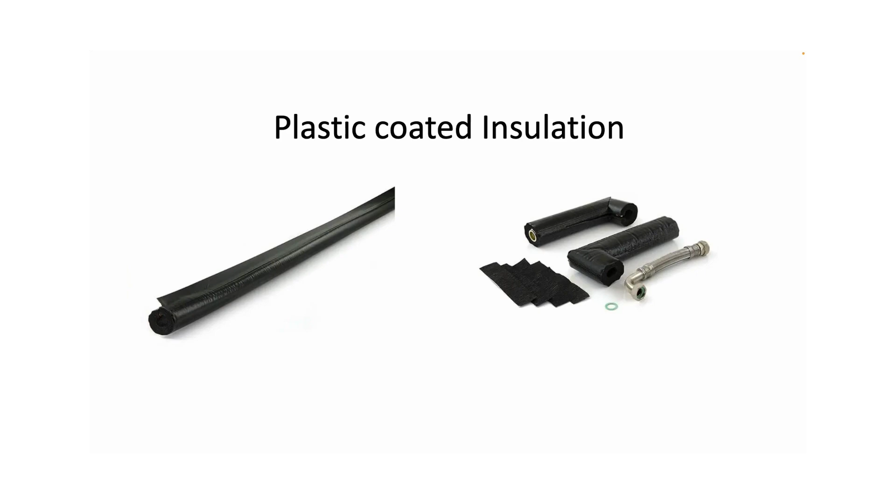Hi everyone, I thought I'd do this quick PowerPoint video to help you understand plastic coated Class O insulation from your competitors and why I've made Primary Pro. To be honest, because we were having these problems. On the air source heat pumps we were fitting this type of thing and it didn't work, and here's the reasons why it didn't work.

The first is, if moisture gets inside that Class O, plastic coated or not, it turns into a soggy sponge and holds the water and starts to deteriorate. If it's plastic coated, it can start to deteriorate it from the inside out. As you can see here, around the outside it's okay, it's not broken through, but you can see it's all cracked. You can see the holes here all the way through, that's turning into a sponge.

This one is exactly the same as the right hand side. That was as it started, and that's 6 months later, just being left outside.

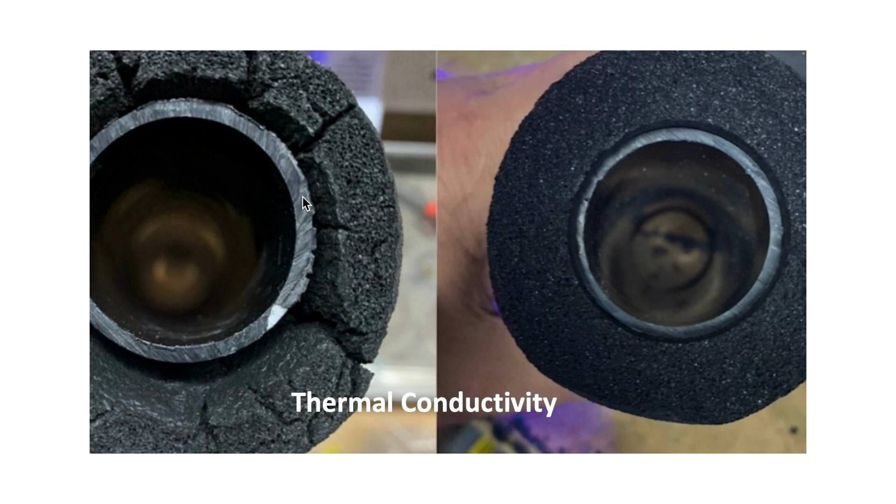We've also got, the biggest problem is thermal conductivity. You need to have the thermal conductivity, the K factor, as low as possible. That gives you the best insulation values. If that's wet, then you've lost all the conductivity. It goes through the roof and loses all its thermal insulating properties, so it just becomes a wet rag that doesn't insulate anything at all.

These are the videos of some plastic coated insulation that we left outside for 6 to 7 months and just left them to the open elements to see what it can do. Let's go through this one.

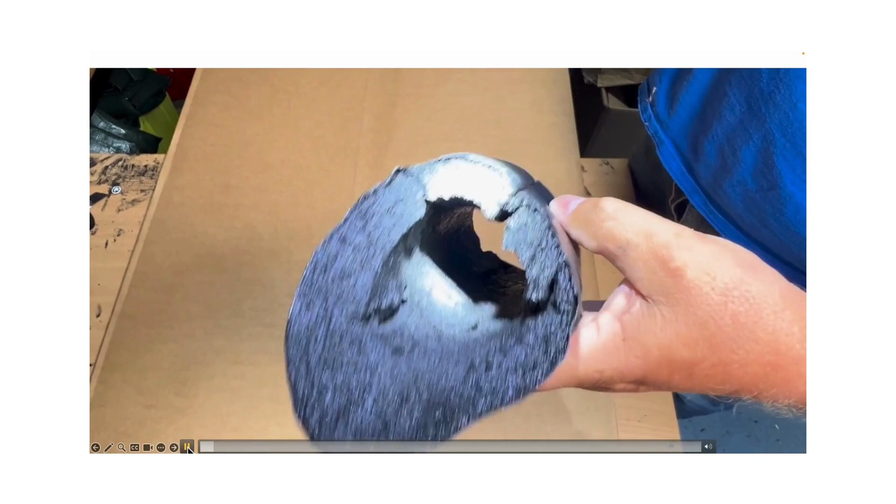As you can see there, the plastic seems to be okay, but inside it started to crack and deteriorate, so that's going to have a massive problem on the insulation factor and on keeping the conductivity level as low as possible.

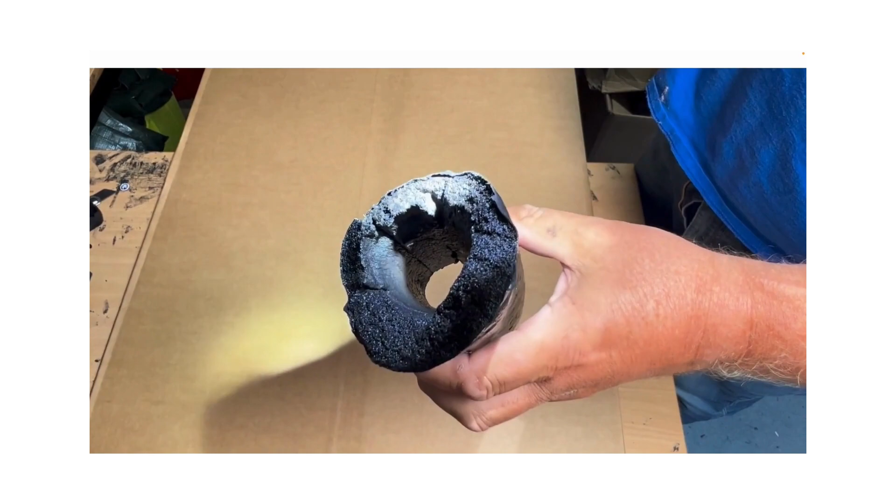There you go, it's all cracked all the way through, so nigh on useless. But the biggest problem is that it then holds water, and if it starts to hold water, it's nigh on impossible to give you any thermal insulation values. As you can see from this, it's absolutely sodden.

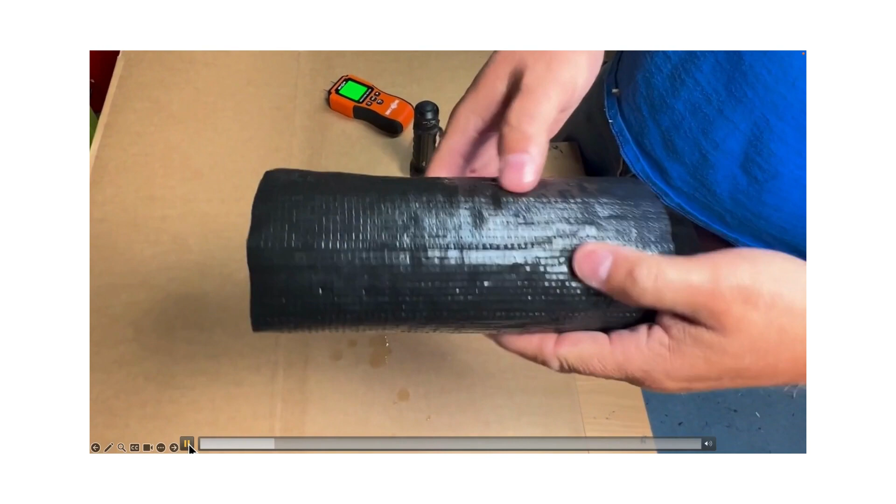This is another one, another type, and as you can see there, can you just see how rough it is? Well, that was where it was facing the sun, and it had started to deteriorate after 6 months. So you can tell there it started to deteriorate the insulation straight away.

But again, absolutely full, no insulation value whatsoever.

If it's not plastic coated Class O, you'll still get no insulation value and it starts to deteriorate. And we found this more with condensates because we haven't got a lot of photos on air source heat pumps, but we will collect them. But as you can see, it's exactly the same Class O.

If it's plastic coated and it's not sealed up correctly, it will then do exactly the same as we've just seen.

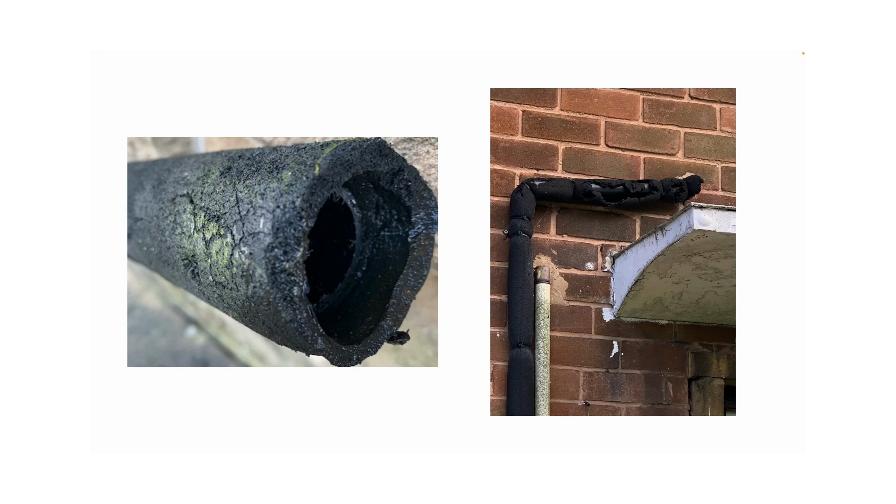The problem again is we need to fit the manufacturer's products to seal it all properly, but the Armaflex or other adhesives are not fit for outside, they're not fit for purpose. So you can see the assembly instructions state: please observe our installation instructions, product data, application temperatures, ideally 20 degrees plus, not below 0 degrees, at an ambient temperature of below 5 plus, or a humidity above 80%.

Increased condensation may form on the surface of the glue or adhesive film. In these cases, the bond is poor or impossible. So that's telling you it doesn't work, and that's why people don't fit it right, because it doesn't work. So they've just left it on its own.

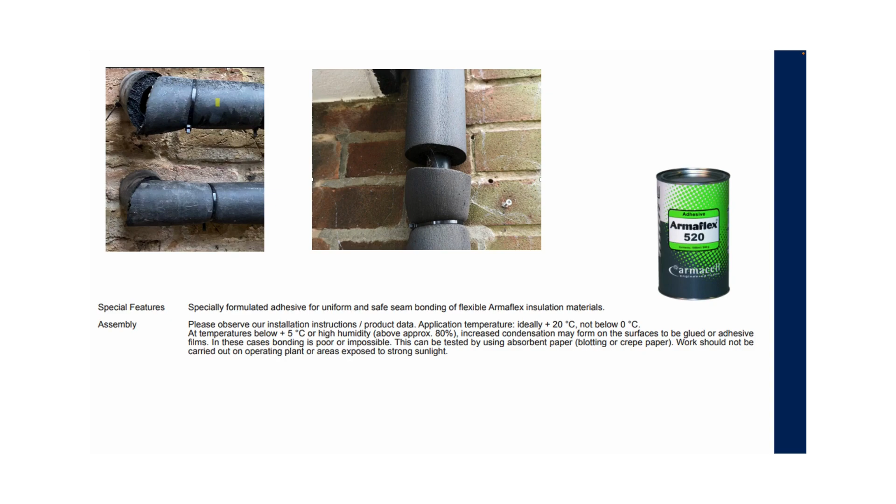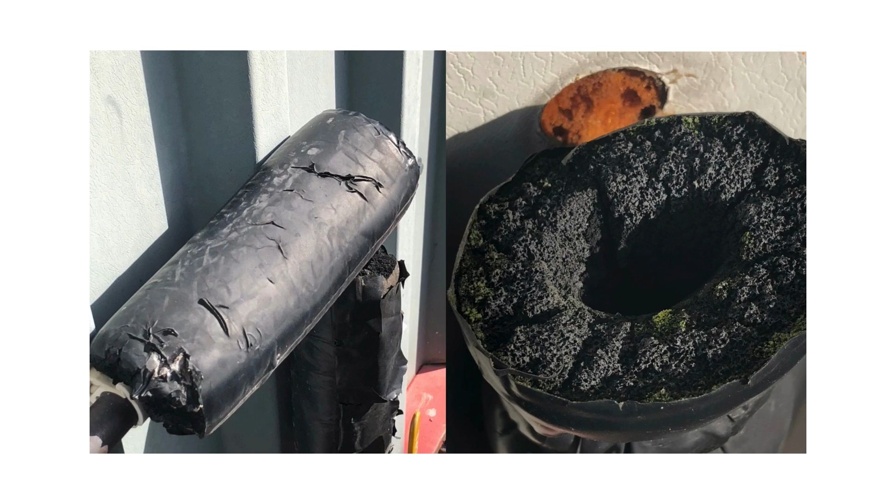Doing all these things right and trying to get it done and not being able to do it is just time and cost, and this is why the guys don't do it on site. This is why it starts to deteriorate, not just on the outside but the inside. They start to fit it incorrectly, start to leave the gaps, then the water will get in, it'll start to deteriorate it.

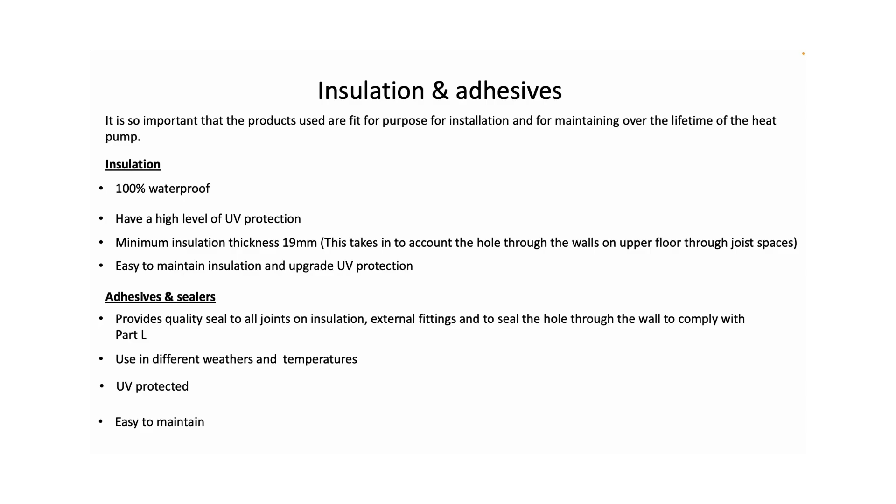So we've got to make sure that the insulation that we're providing has the certain elements that we need to help the installer. It's so important that they're waterproof and all these things, but we've got to make something that's fit for purpose on site, because if not, they don't do it.

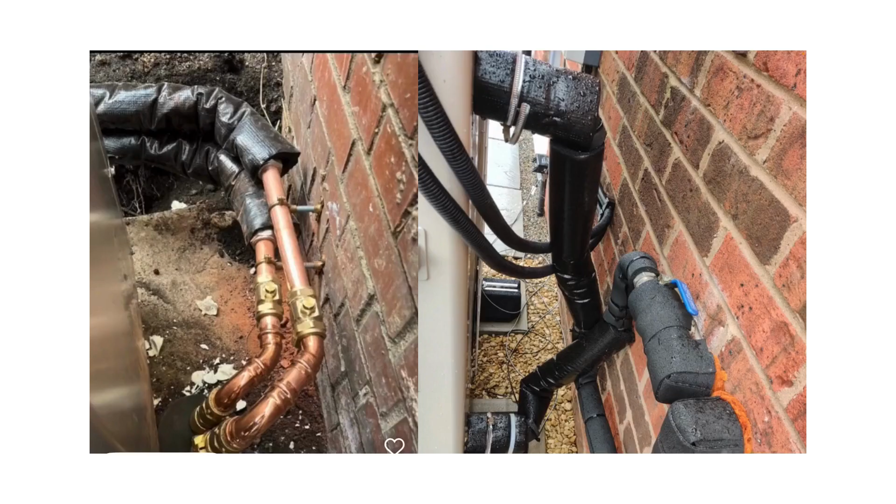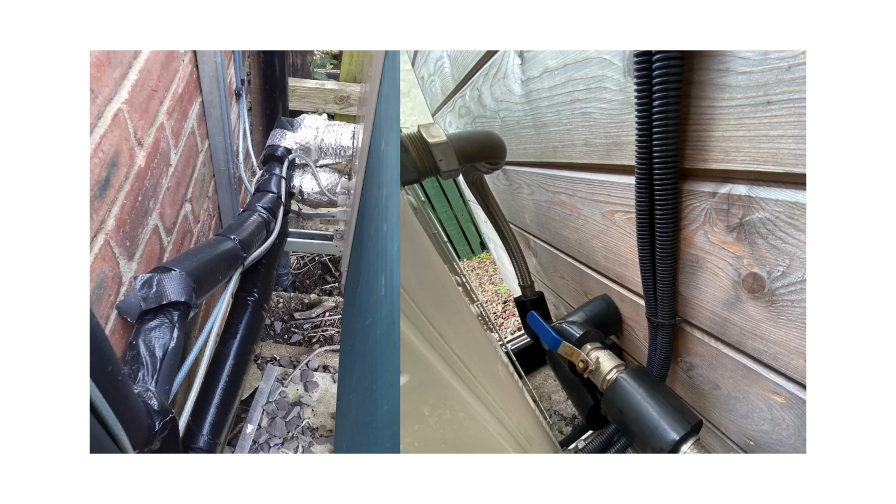And just look at this. Just think that you paid 16 to 18,000 for an air source heat pump, and this was what you was left with. Look at how it looks on the customer's house.

So we've got to find a product that's fit for purpose. We've got to find all the products, not just one product. We have to find a solution.

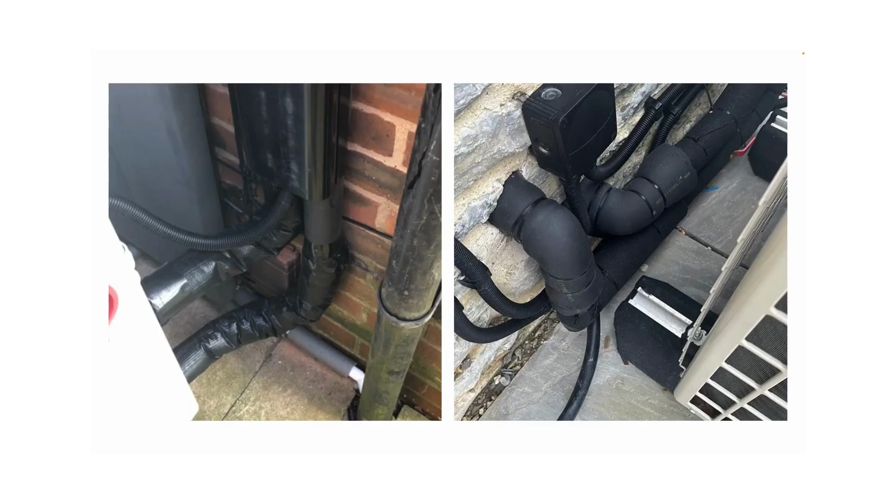As you can see on the left, they've used a flexible, one of our flexes on that one, but still not done it right because they've used some Class O. This one on the right, again, they've used some Class O, and then they've used plastic coated flexes. It's not the right job.

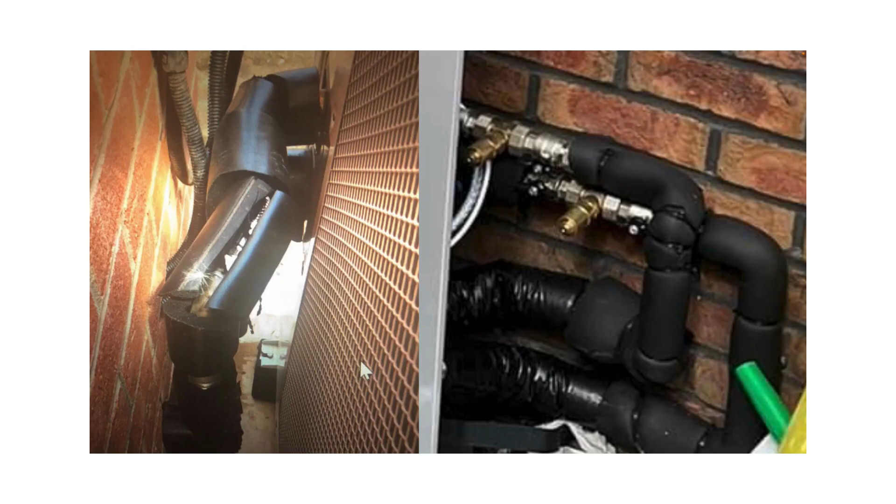Just leaving all the gaps for it just to fail in 2 or 3 months, that'll be sodden. So we've made the products, with our Primary Pro, we've made the products. We've looked at the problems, we've found solutions, and then we've found a total solution.

This is your bent flexi, with two jackets for the end, and then we've put another piece of insulation in, so that seals every part when they've fitted it all together onto the ends. Other insulation, your other flexibles don't have that. We've put everything into a pack. On your straights, exactly the same, but with a piece in to seal the ends.

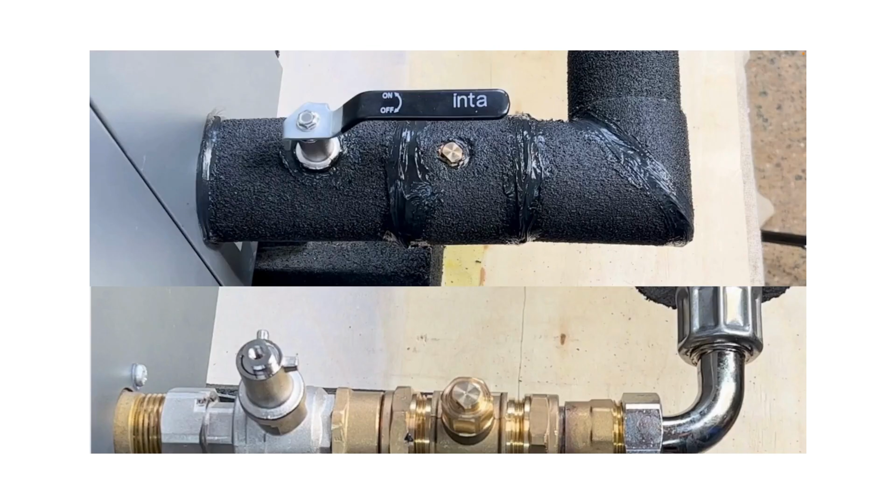So we've made the solution. Looks great, it can also be sealed on every single part. The bottom part there has got your lever valve on and an antifreeze valve, but look how it's all sealed, look how it's all done. It's all done for the installer, so the installer really does like the products. So we've just got to get the products on the shelves.

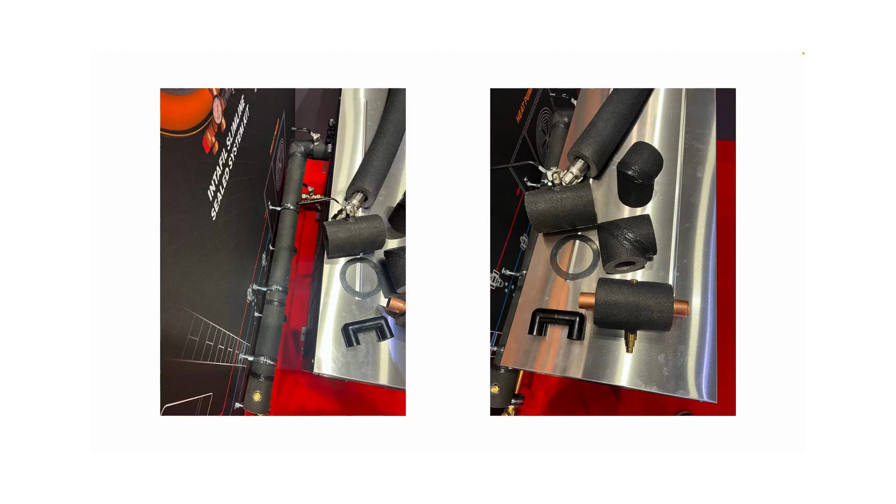One on the left was the display installer. Tell me that a customer wouldn't like that on the back of their house. So it's a lot better than what they've been given. In the past 18 years, it's just been plastic flexes with Class O.

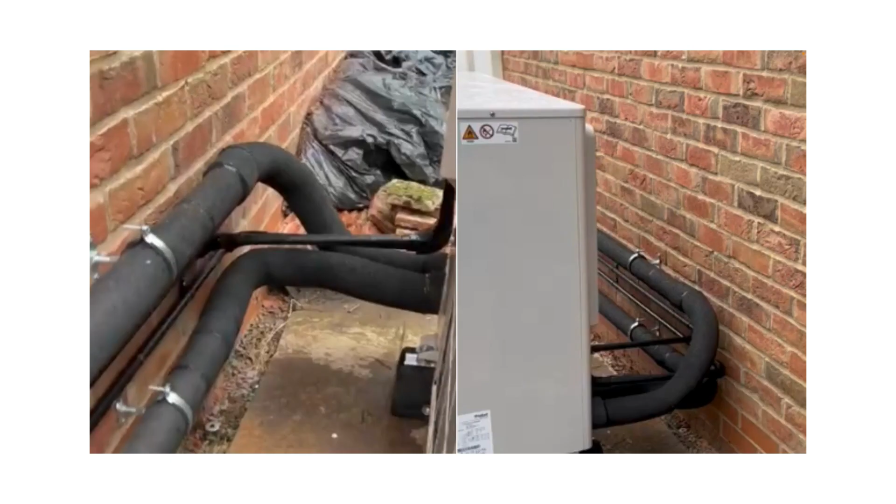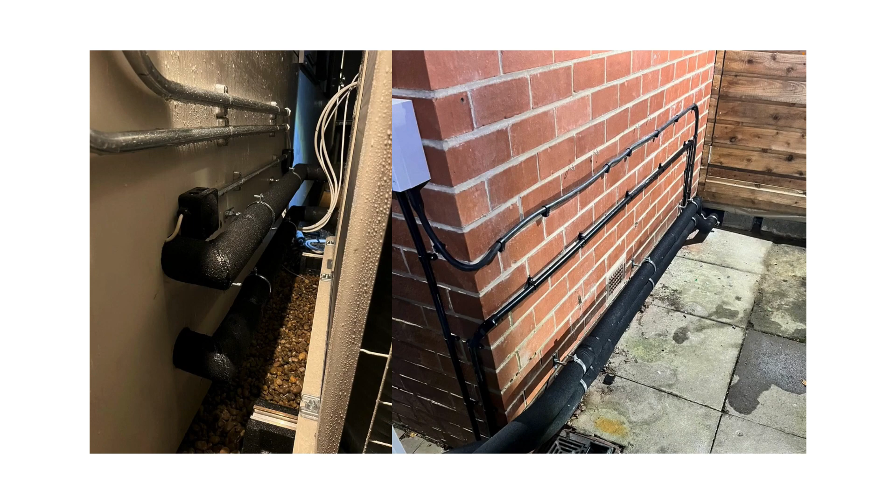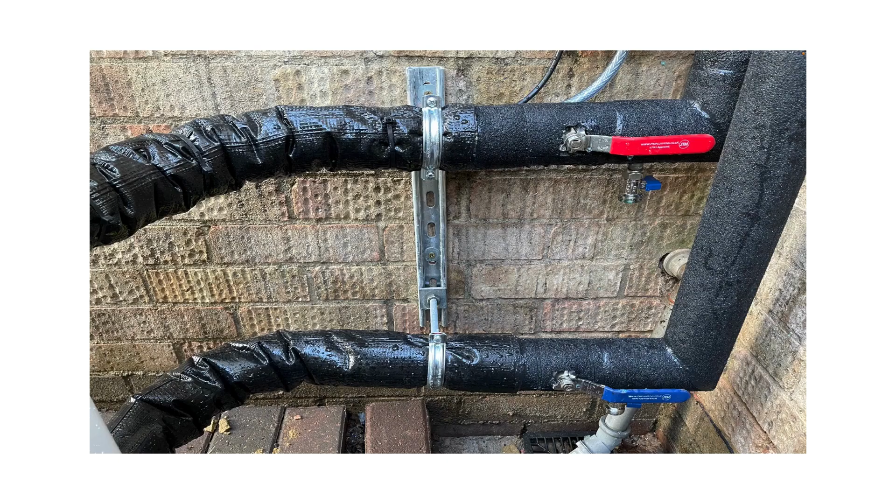These aren't - so they've used our Primary Pro, but they've not used the flexes. Now you tell me as a customer, would you like to see that on your house? And is it going to seal? We've tried to - this installer's tried to seal all the joints up. We've left the lever valves and it's sealed up properly, but still it looks a mess.

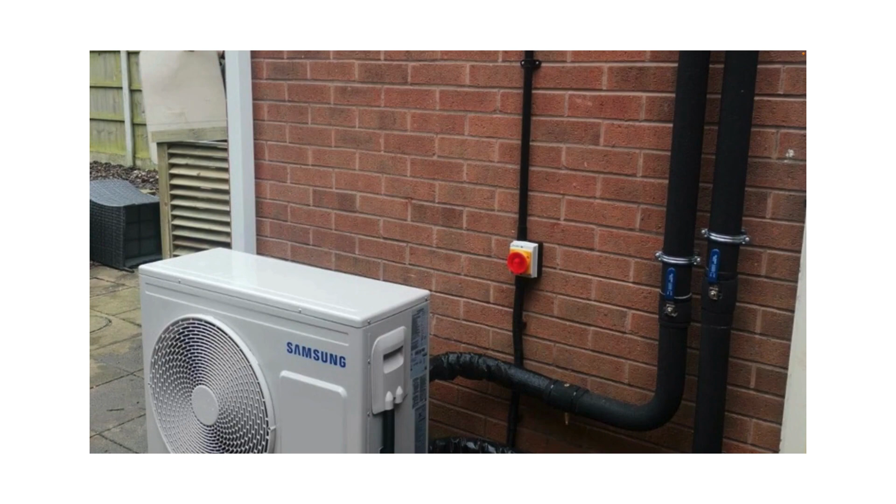So we need to make sure the prices are the same for the flexes, it's just making sure the installers know and the merchants have got them in stock. There's another one with my Primary Pro on, then a flexi. So obviously the merchants haven't got them in stock because they certainly would be using them if they saw how good it was. Another one here, fantastic installation, all from the top using Primary Pro all the way down.

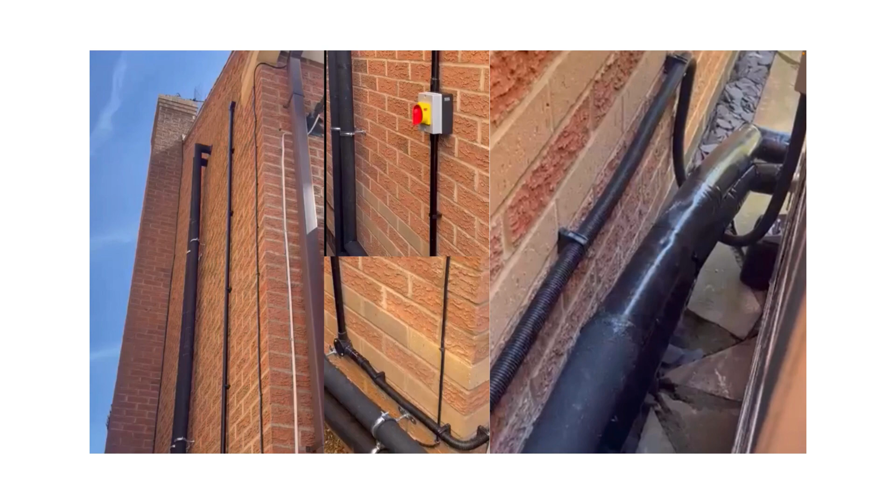And then it gets to there and he's used some plastic coated flexes because obviously he's not got the others. So we have to get out there, make sure the merchants got them, and then show the installers that they've got everything they need.

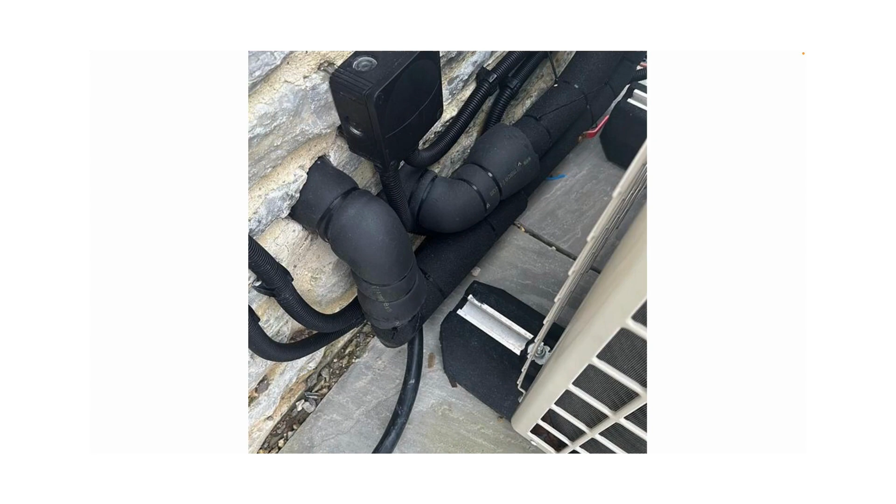So what's the key points? Well, for your Interflex, my Primary Pro, waterproof out of the box, easy to fit and seal in all weathers, simple to maintain throughout the lifetime of the heat pump. So we're looking at the positives, we're looking at why is ours different to everybody else's. With our maintenance coat and our bond and seal, we can maintain all the products.

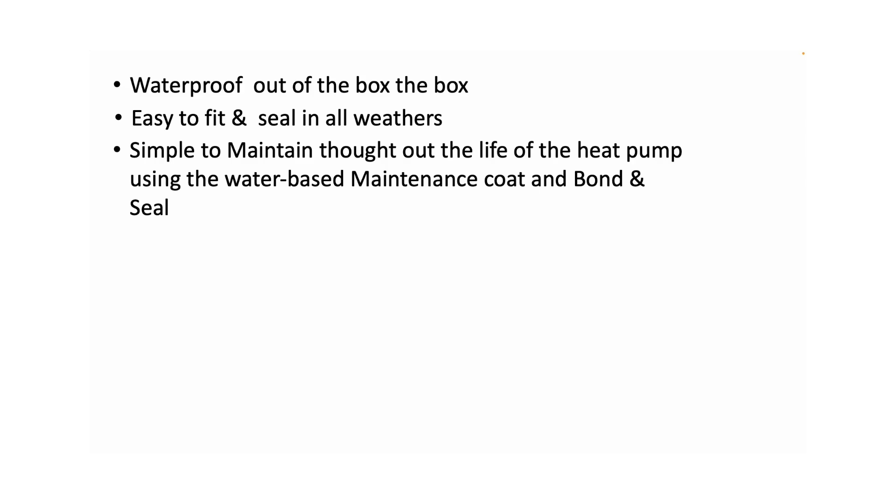Maximum UV protection on the market that can be maintained. Provides the best insulation factors in all weathers. Helps installers fit fast, so we're helping them to fit fast in all weathers and when time and weather is not on their side. Helps installers to get paid. So just look back at those jobs that we've just seen and just imagine a customer coming back and going, I ain't paying you until this is all sorted. We alleviate all that because we've given them the products that they need to do the job right.

Have you got any more USPs? Let's get some more added. Let's look at it from the customer's point of view, the installer and the end customer. What do all our products, not just the Interflexes, what do all our products provide? Yeah, and that is where we're selling. We're selling a solution. We're not selling SKUs and products.

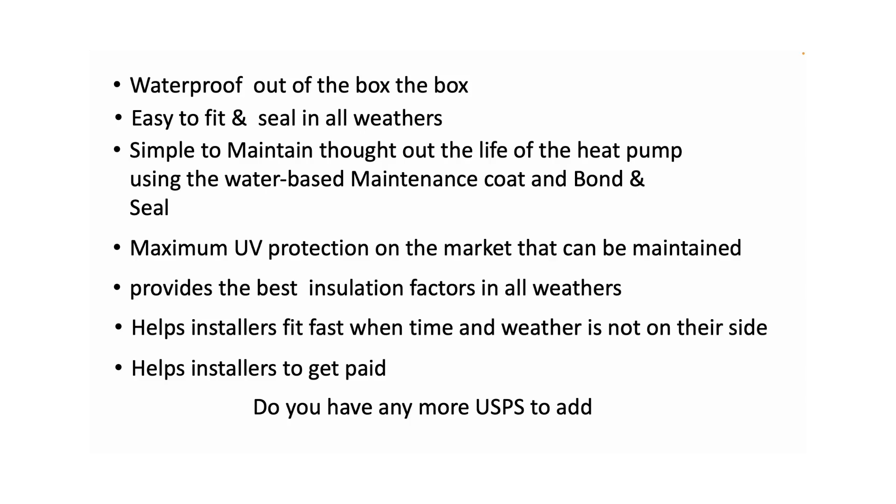Inter have every product, and for me, I'm not just saying it because I'm with you guys. I said to Darren when I was fitting air source heat pumps, if I'd have known that, I'd be fully onto Inter, because you've got a filter, you've got all the products, the flexibles, the insulation, so the installers have got everything they need to do the job correctly.

Yeah, and we're there to help them, there to support them. So that's what we need. We're only on 60 or 70,000 - it's going to be getting up to 4, 5, 600,000 installs if we are the ones that they come to, the ones that they know, like, and trust, because we have provided the products. Why would they go anywhere else?